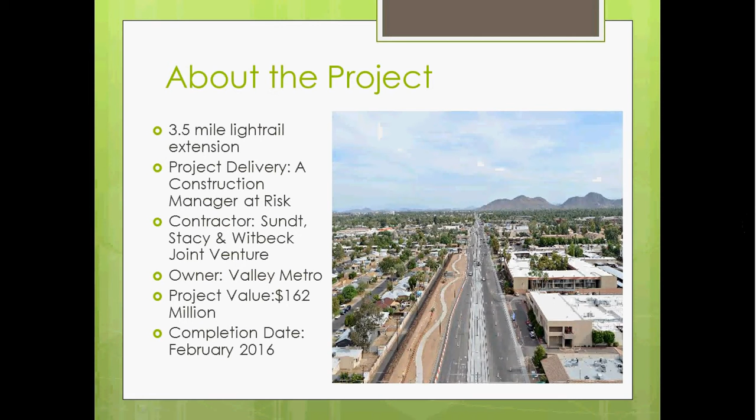Our project location was in Northwest Phoenix. It's the 3.5-mile light rail extension. The project delivery method was a construction manager at risk, with the contractor being a joint venture of Sundt and Stacy and Witbeck. The owner is Valley Metro. The project value is around $162 million, and although most work is complete, the final completion date will be February of 2016.

For the activity analysis, we took 12 observations for a total of 794 data points. The majority of the work was direct work, followed closely with 14% waiting, 13% preparatory work, 12% traveling. The percentages pretty much died off after that. The trades are concrete finishers, mason workers, landscapers, steel installers, electricians, and general laborers.

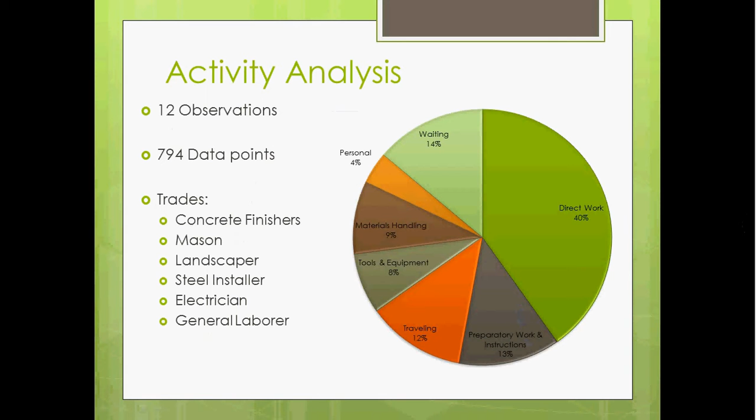From that pie chart, we were also able to break that down by an hour-by-hour figure and make this chart, which shows how work changes for each hour. As you can see, work maintained pretty consistently before lunch, although after lunch you could see more personal time was taken, as well as materials handling.

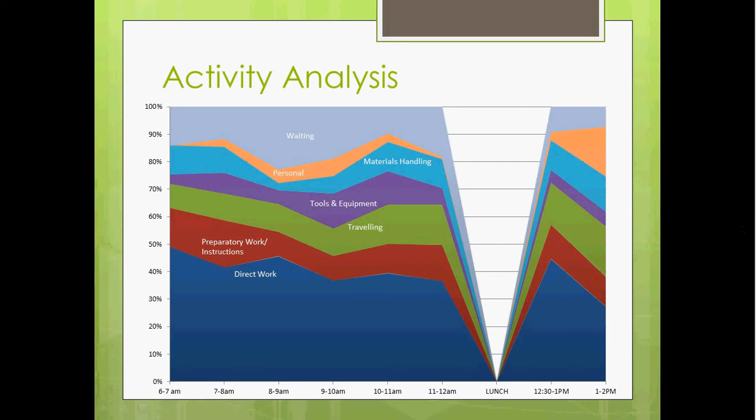So now we're going to talk about some activity improvement methods that could be implemented on site. One would be material location and allocation to reduce time between traveling, establish a stronger system of communication between the managers and the workers, implement a strong pull planning to ensure steady movement, daily work assessments between managers, improve employee knowledge through company retention, as well as avoid extended overtime, as study shows that overtime tends to decrease productivity, and employ new technologies.

Next, we did a crew balance analysis where we observed a landscape crew installing irrigation line in the park and ride. This is our crew balance layout here. This green area shows the work area that they needed to install the irrigation line. They were surrounded by an aisleway that was used for driving, and it had to be kept clear so that other craft workers could drive in and out of the park and ride to do other various work. The trucks were parked on the side and was the only area that was storage for the equipment and materials that needed to be installed.

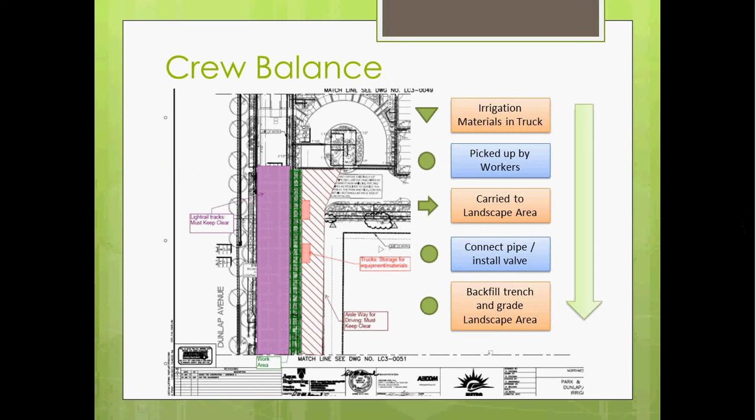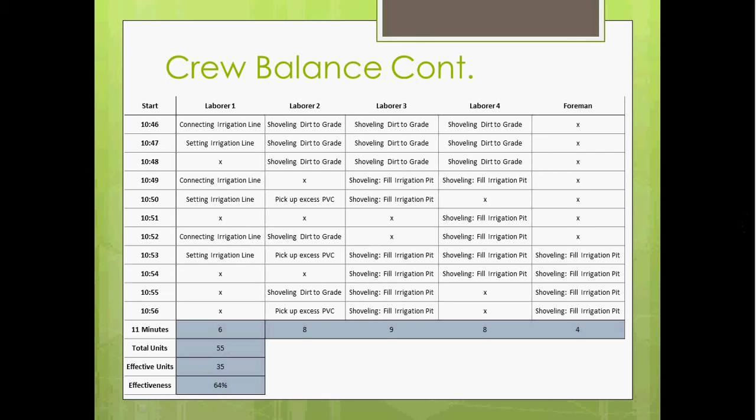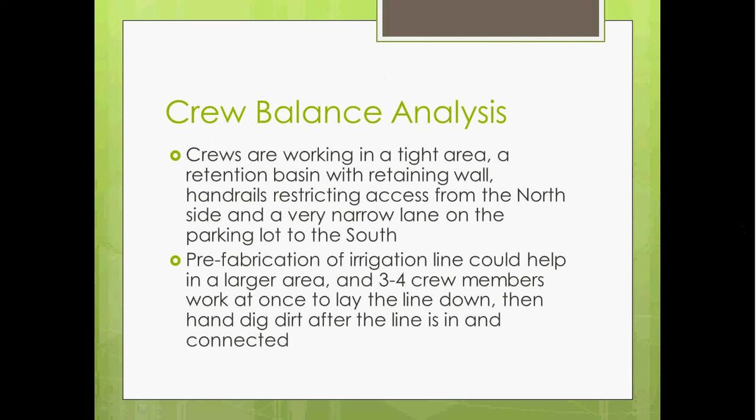Out of 55 total units, 35 were effective, giving an effectiveness rating of 64%. However, it can be seen that a lot of moving and shoveling of dirt was taking place. So we could eliminate some laborers to increase our effectiveness. Another issue was the small work area. So prefabrication of the irrigation line in a larger area in the park and ride and reducing crew members could help increase productivity.

As far as safety is concerned, weekly job-wide safety meetings between the owner, subcontractors, and general contractors took place. From this, the project managers and foremen would meet, and after that meeting, the foreman relayed all information to the rest of the workers on site. Toolbox meetings and hazard analysis were used for each task, as well as monthly job site safety walks from different members of the crew.

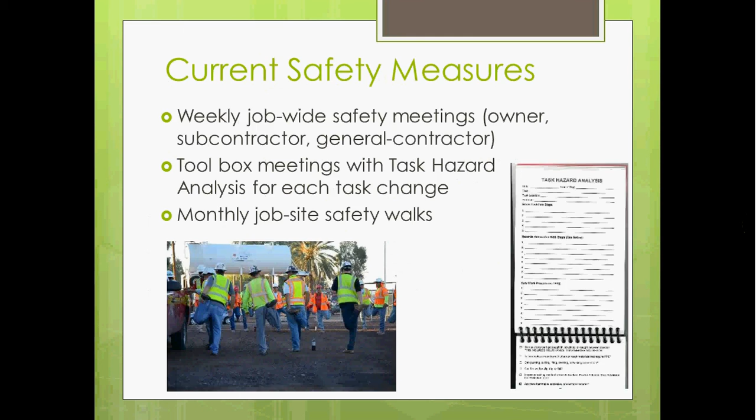So this construction site had some typical hazards such as pinch points and heavy equipment, slips and falls, but because it was open to the public and there were overhead wires, they also had problems with arcing. You don't want that current from the overhead wires arcing and hurting anybody on the job site, so they had to be very careful to avoid that.

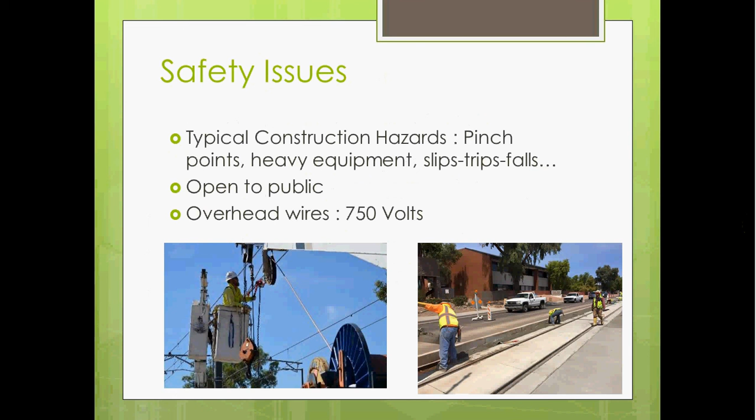Also, since the work was taking place in the middle of the street, there were cars and traffic that would be passing all throughout the day on both sides of them, so they had to make sure that all MUTCD rules were followed and that there were no accidents between the workers and vehicles.